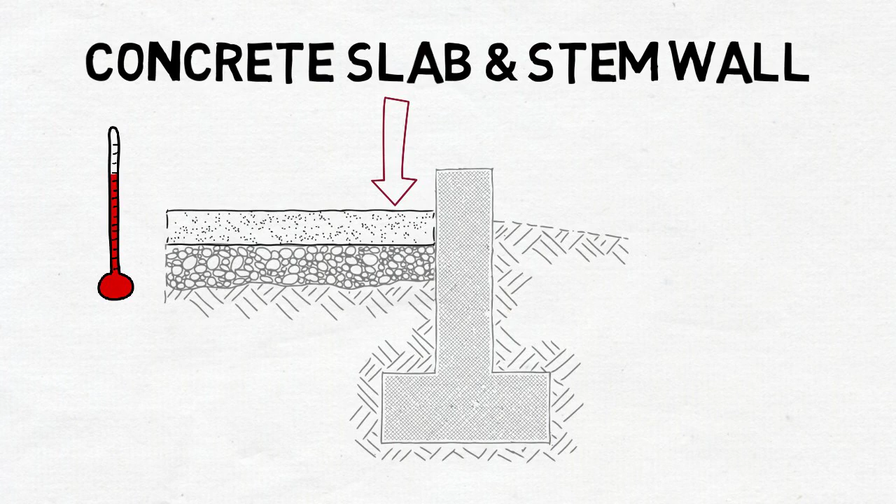In today's video, we're going to show you a passive house detail for an insulated slab up against a stem wall. We are going to use concrete slabs and stem wall, and here are some reasons why they are good. You have effective thermal mass inside your envelope. You can put radiant heating inside of it. It's a straightforward construction detail, and you don't end up with crawl spaces.

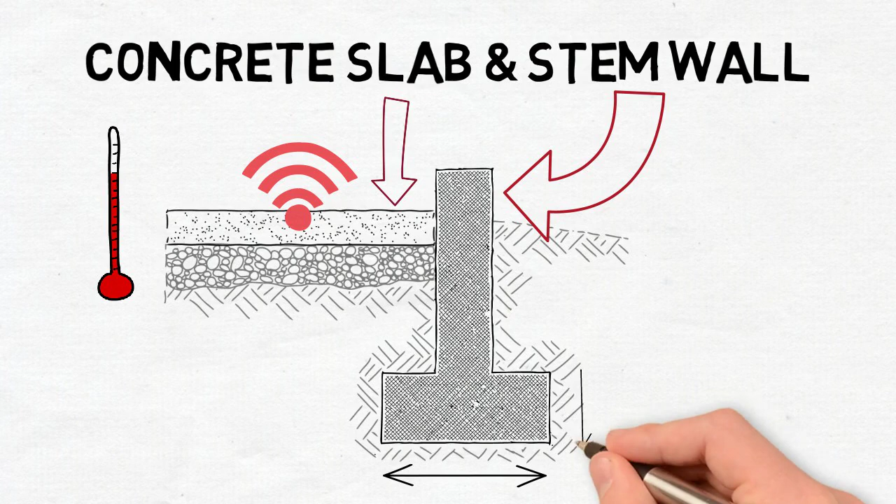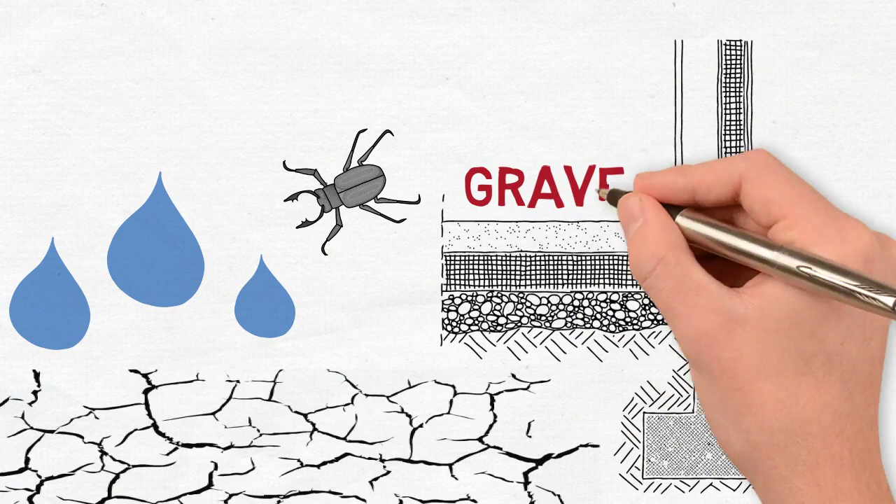The project was done on a very wet site, with unstable soils and exposure to insects, so we wanted traditional footings. There is gravel underneath the insulation and the slab. First, we're going to establish the barriers. Thermal boundary is on the top of the gravel, below the insulation, then up between the foundation and the slab, underneath the wall and outside of it.

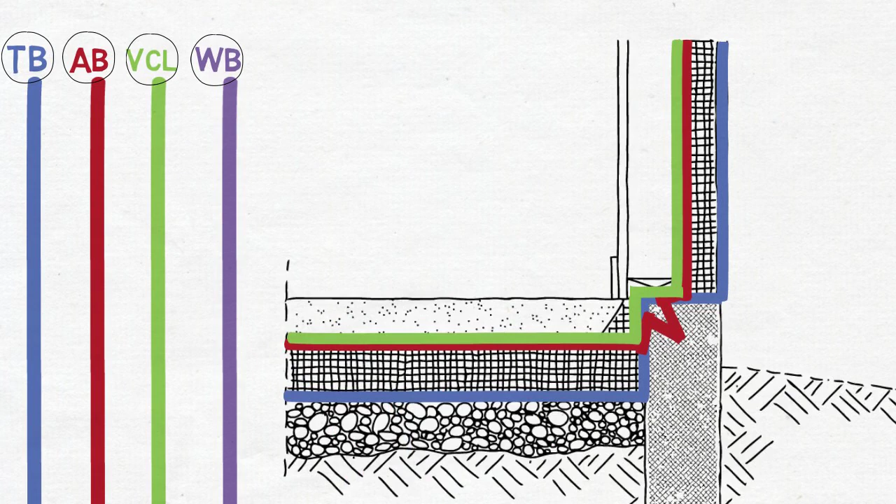Air barrier is on the top of the EPS insulation, and then it is attached to the concrete and along the OSB. The vapor control layer is the same as the air barrier. The weather-resistant barrier is located along the OSB, and it is starting from the top of the concrete foundation where we use a capillary break.

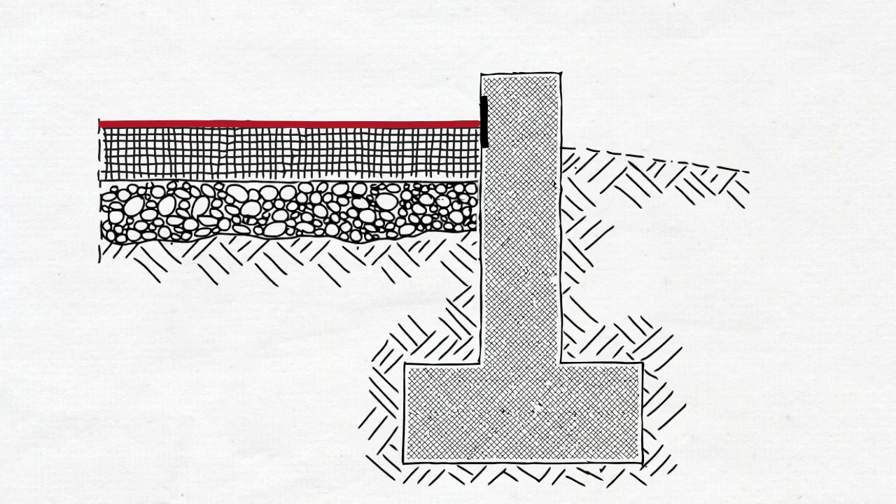Sequencing for the air barrier connection. The first step is casting the stem wall, then placing the gravel, laying the EPS and 10 to 15 mil poly across the EPS. Spread it until the face of the stem wall. Then we tape the ending to the concrete. Here, the concrete itself becomes an air barrier.

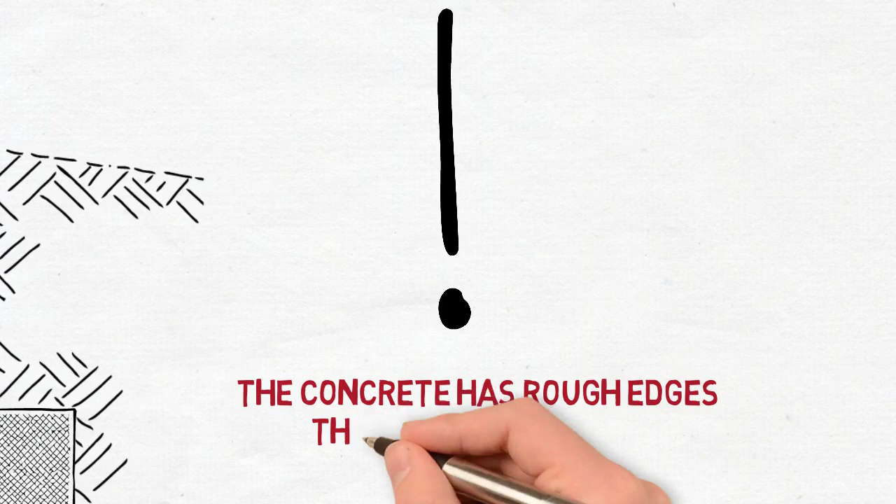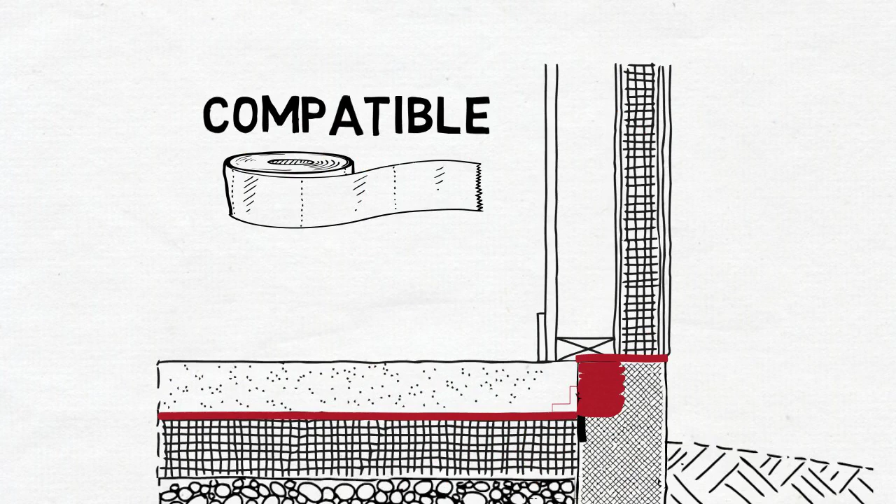The poly is not wrapped around the concrete because the concrete has rough edges that can make holes in the continuity of the air barrier. The type of tape you use must be compatible with the concrete and may require primer to adhere. Tape and sealant compatibility with both the poly vapor barrier and the concrete stem wall is a critical detail to verify prior to construction.

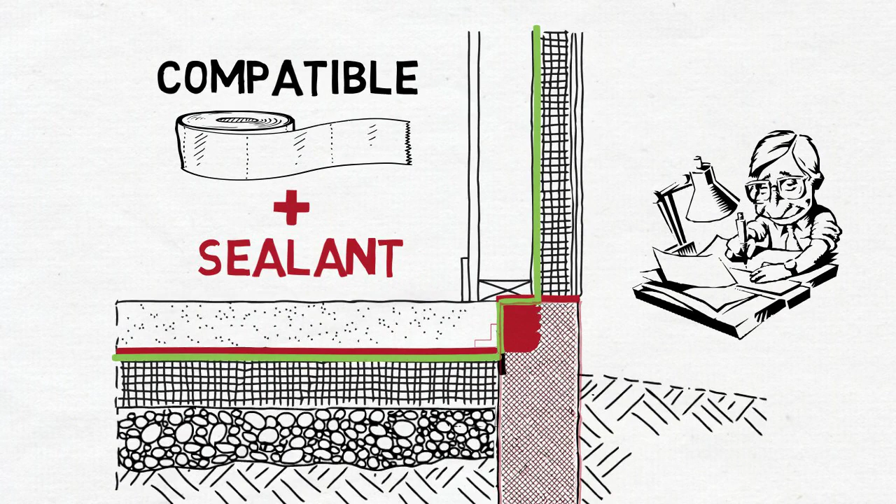Going up, the face of our structural sheathing is the air barrier. So we fill the void between it and the asphalt primer with a sealant, and that finishes our air tightness. Just in case, we also use a sealant and the tape at the ending of the concrete, and we install a custom-made EPS.